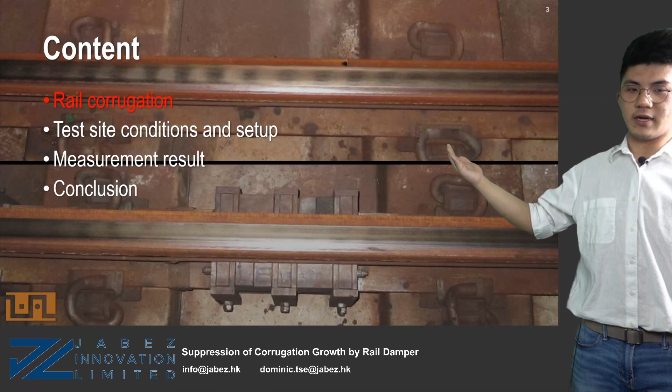Here's the content I'm going to cover today. We'll first start with a brief background on rail corrugation. So what is corrugation? It is a wave-like pattern that will form on the rail surface.

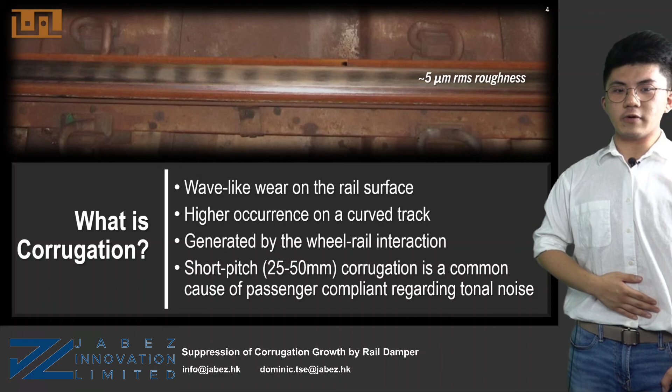Corrugation is clearly seen in photos, although it's only around 5 microns in depth. It appears more on curved track, as it involves a more complex wheel-rail interaction. According to our experience, it typically appears on the low rail only. In general, short-pitch corrugation noise is a common cause of complaints from passengers.

Regarding corrugation control, rail grinding is a common practice to reprofile the rail surface. This process will however reduce the life of the rail. Each grinding typically grinds away 0.2 to 0.8 mm thick of material off the rail head. Around 10 mm to 15 mm thick of material could be removed before the rail has to be replaced.

Corrugation formation is usually tied to wheel-rail dynamics. One notable model is the stick-slip model. The noise frequency is determined by the corrugation wavelength and train speed. We believe that the corrugation generation mechanism is dominated by the rail dynamics.

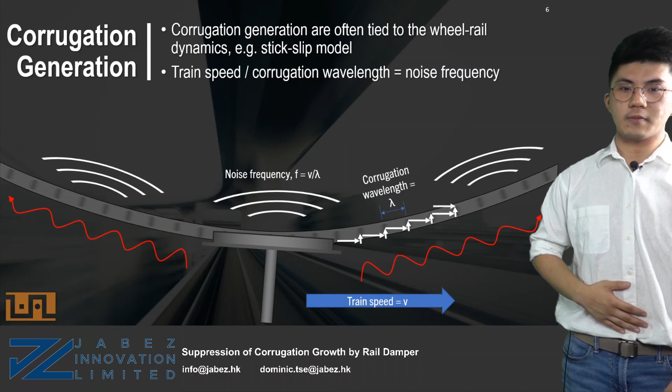Our previous paper, published in 2012, showed that the two-mass rail damper could reduce corrugation growth rate by 41 to 47%. The rail damper altering the rail dynamics was believed to be the reason behind it. To dig further into this topic, we conducted another site trial with our newly designed rail damper.

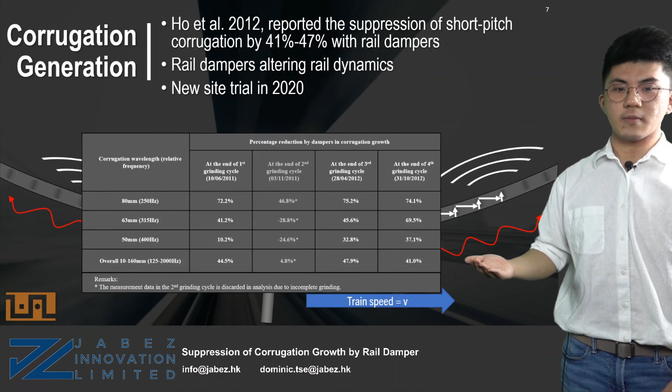Our rail damper adapts the two-mass damping mechanism with a targeted frequency below 1 kHz. The vibration energy of the rail is transferred to the oscillator and dissipated by the resilient layer. The amplified vibration at the tuning frequency achieves high energy dissipation.

It can dissipate both the vertical and lateral rail vibration. And you can observe that the oscillator has a much higher vibrating amplitude than that of the rail.

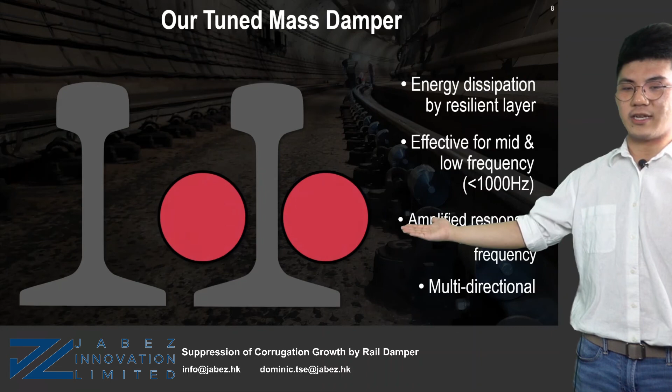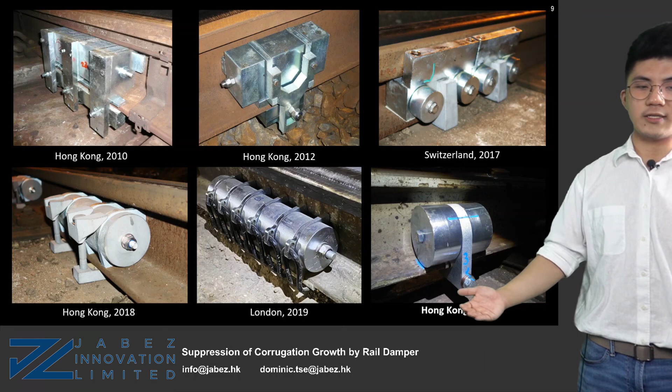Our first site trial was conducted in 2010 and lasted for 2 years. The results were published in 2012, and since then we have conducted a few more site trials, mainly in Hong Kong as well as other cities over the world. This is a rail damper that has been installed at the latest site trial in 2020 in Hong Kong.

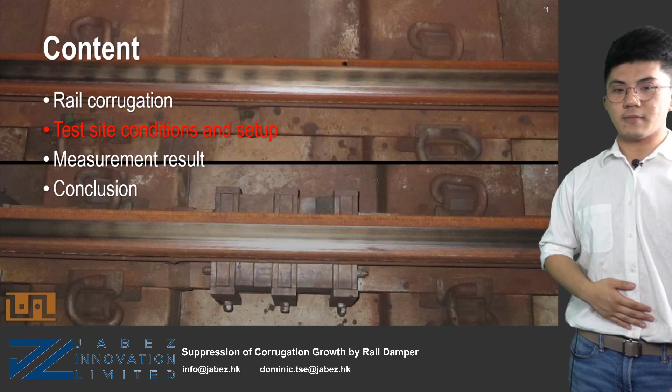Next, we'll talk about information regarding the test site and the rail damper configuration. It was a curved track with a radius of 300 meters. The track was supported by a resilient baseplate with a stiffness around 50 kN per millimeter.

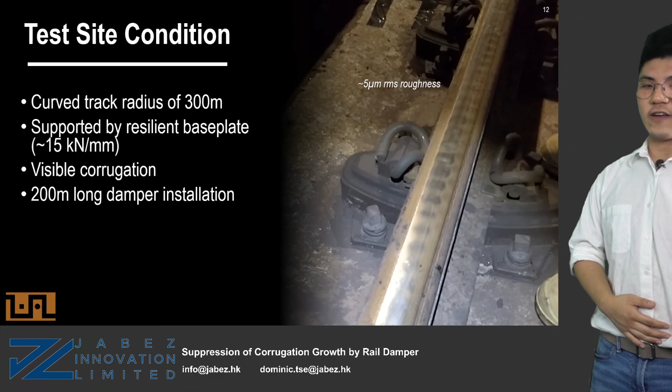Corrugation was clearly visible in the photo there, although the depth is only around 5 microns. The rail dampers were installed for 200 meters long.

Before installing the damper, our team conducted a track mobility measurement on the test track. The measurement was conducted for the vertical and lateral mobility, where an accelerometer was placed on the rail head, between the sleeper and above the sleeper.

Here we have frequency on the x-axis and mobility on the y-axis. The red line shows the mobility between the sleeper, and the green line shows the one above the sleeper. The result shows that the pin-pin resonance occurs at 1030 Hz for the vertical direction, while 570 Hz for the lateral direction. The lateral pin-pin resonance has a much higher mobility than that of the vertical pin-pin resonance.

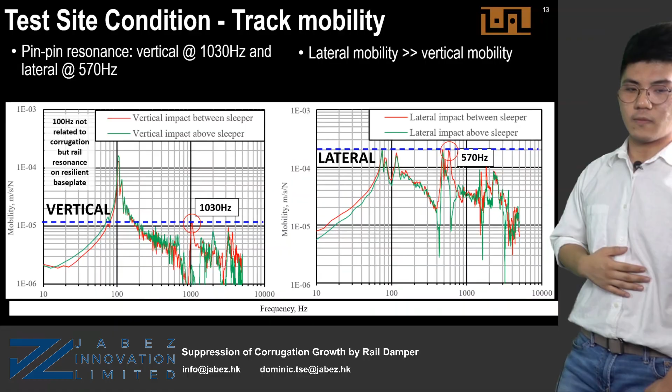So the dampers installed were tuned to 550 Hz with a damping coverage of 400 to 700 Hz. Dampers were installed at each spacing between the sleeper at the low rail, while for the high rail, dampers were installed at every fourth spacing between sleepers.

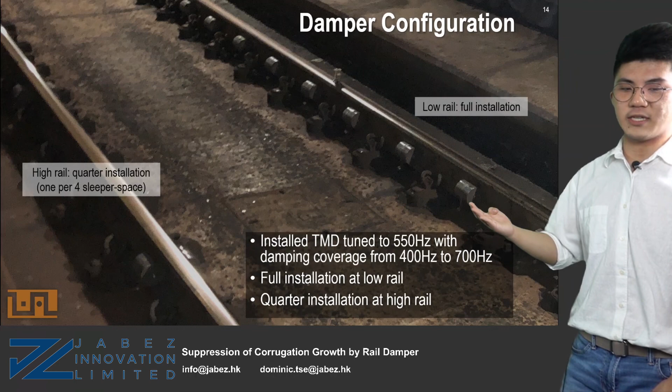Here shows some more detailed photos of the damper installed. Our damper has a reference line to monitor the oscillator movement, and here's a full installation photo and also the installation process.

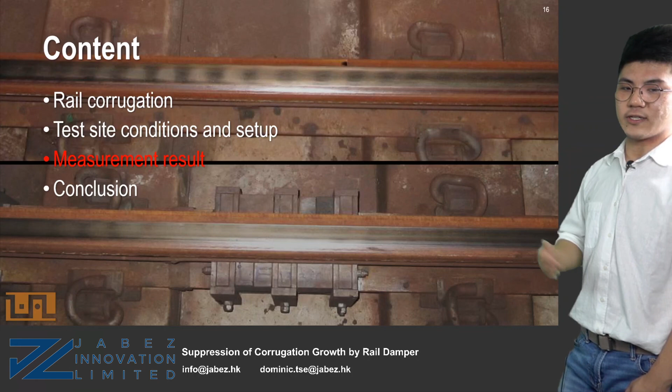The coming slide will talk about the measurements conducted and the results. We are going to present two measurements today: the rail corrugation roughness measured by the corrugation analysis trolley, and also the track decay measurement with 17 channels of accelerometer and 1 channel of impact hammer.

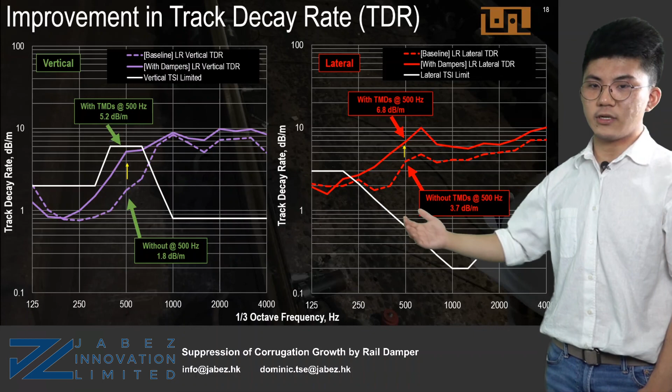First, let's look into the track decay measurement result. On the x-axis, we've got frequency in 1/3 octave band. On the y-axis, we've got TDR in dB per meter. The TDR at our target frequency of 500 Hz band is improved by 3.4 dB per meter for the vertical direction, and 3.1 dB per meter for the lateral direction.

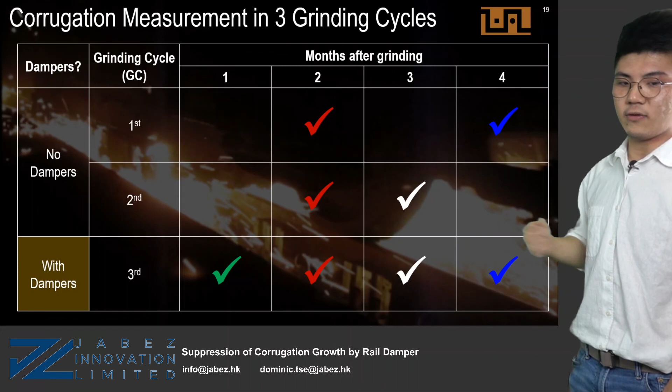With the damper known to be able to alter the rail dynamics, next we're going to talk about the corrugation measurement result. We have conducted corrugation measurement within three grinding cycles to monitor the corrugation growth. Please note that there is no damper installed in the first two grinding cycles, while the third one is the one with the damper installed.

Here's a table that was presented in the paper. We'll then look into the roughness of each grinding cycle in the coming slide.

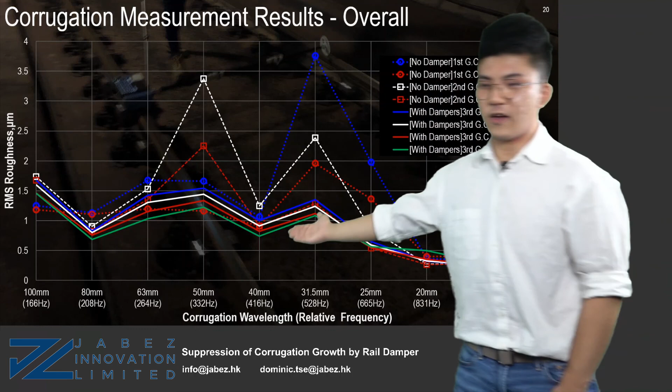With 1/3 octave corrugation wavelength band and its relative frequency, to the train running speed on the x-axis, and the RMS roughness is on the y-axis. As shown in this graph, rail corrugation has peaked at 31.5 mm and 50 mm wavelength bands. A very interesting observation is that the peak at 31.5 mm is very close to the pin-pin resonance frequency. In a 1/24 octave analysis presented in the paper, the peak was at 563 Hz, which is even closer.

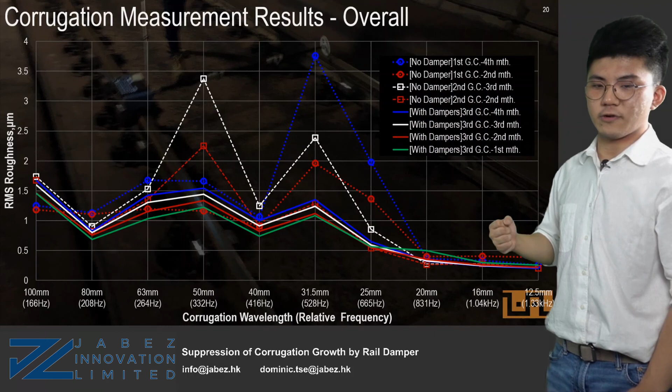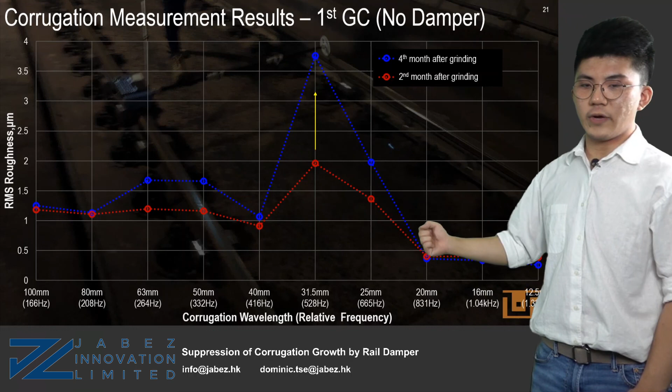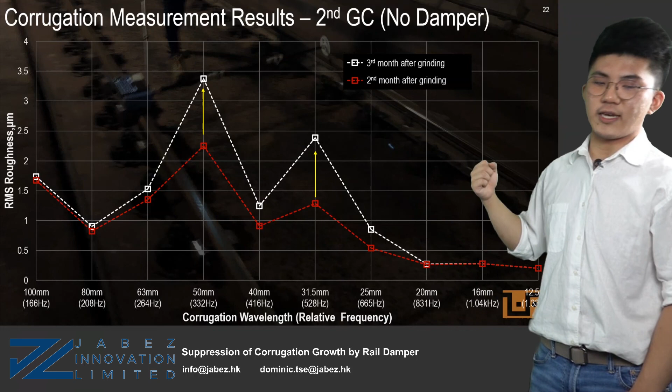Let's look into the data in more detail. In the first grinding cycle, without any damper installed, we can see the corrugation at 31.5 mm has grown sharply. In the second grinding cycle, also without any damper installed, different from the last cycle, on top of the 31.5 mm wavelength band peak, there's also a 50 mm wavelength band peak.

After the rail damper was installed for the third grinding cycle, you can see the corrugation growth has been significantly reduced. The two peaks are no longer as prominent.

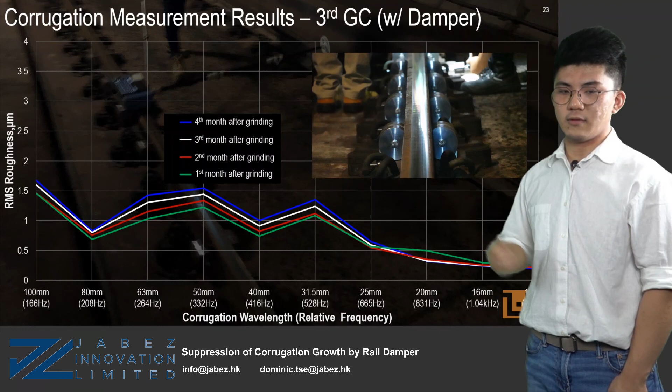We also plotted the RMS roughness of each 1/3 octave band against time. Here's the 31.5 mm band plot. The corrugation growth rate in the first grinding cycle is 1.26 microns per month. In the second cycle, the growth rate was around 1 micron per month. Interestingly, after the damper was installed at the third grinding cycle, the growth rate was reduced to 0.12 microns per month, which is around a 90% reduction.

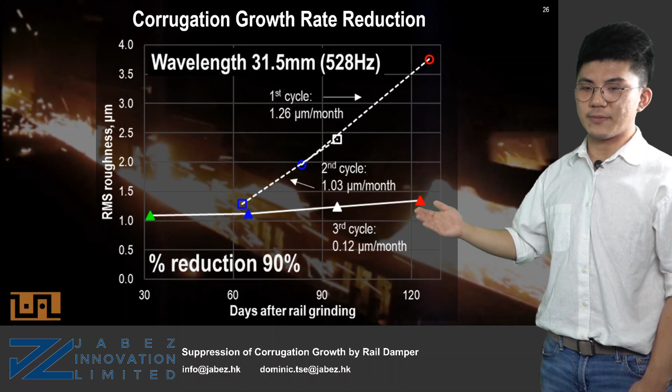Among other short-pitch corrugation wavelength bands, around 54 to 90% reduction were achieved.

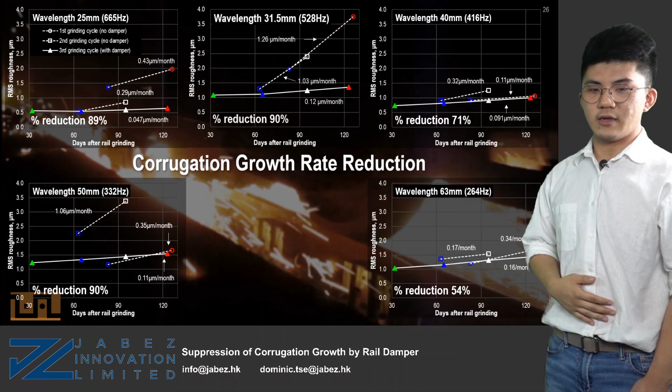So in conclusion, corrugation growth rate is reduced by 90% at the target frequency, and the TDR was improved by 3 dB per meter at the target frequency as well.